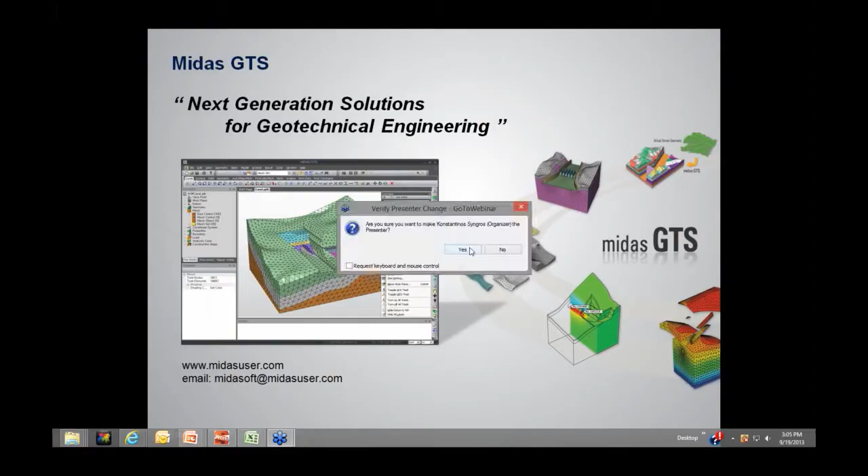Hello everybody, good afternoon. My name is Konstantinos Syngros, and today we will be presenting a case study on the foundation design for the Kingdom Tower, and how we used finite element methods to do the design, along with my colleague Alan Popel.

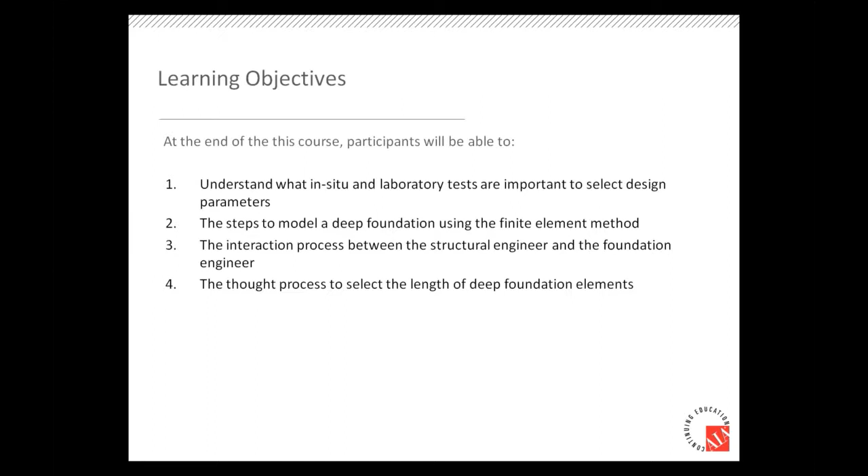Today's learning objectives will be to understand what in-situ and laboratory tests are important to select design parameters for this magnitude of project, the steps to develop a model of a deep foundation using the finite element method, the interaction process between the structural engineer and the foundation engineer, and the thought process to select the length of the foundation elements.

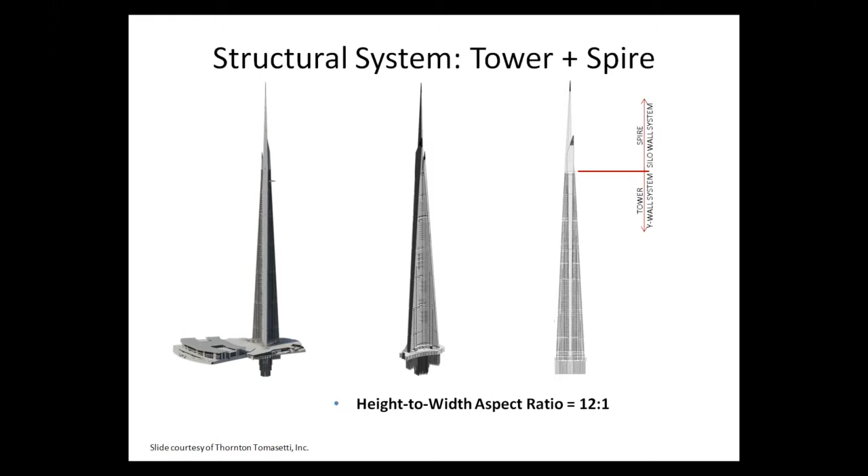This is a rendering of the tower. We can see on the left also part of the podium and part of the foundation. It's going to be a very slender tower with a height to width aspect ratio of 12 to 1. Just to put things in perspective, the spire is approximately as tall as the Chrysler Building in New York City.

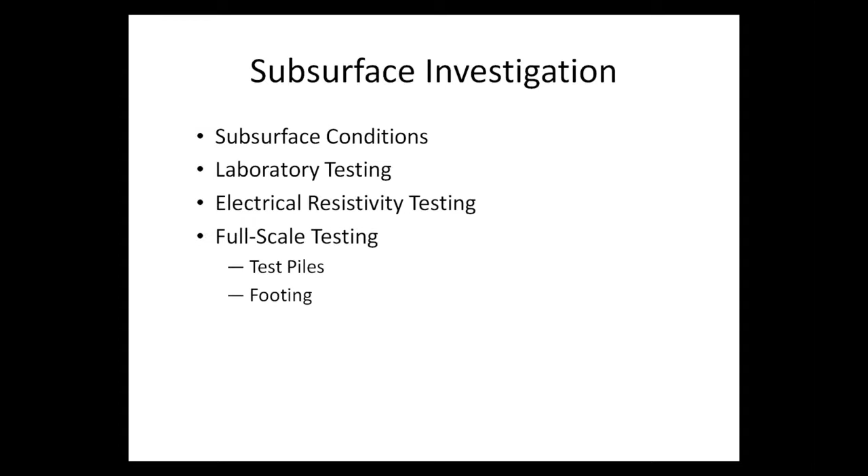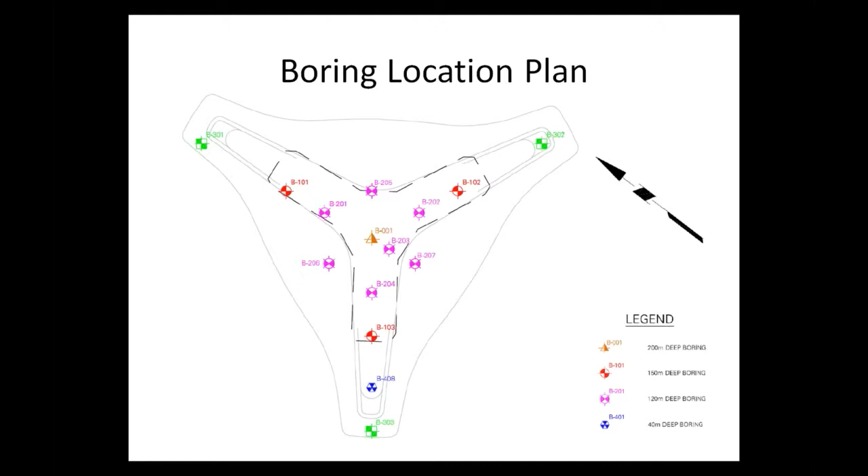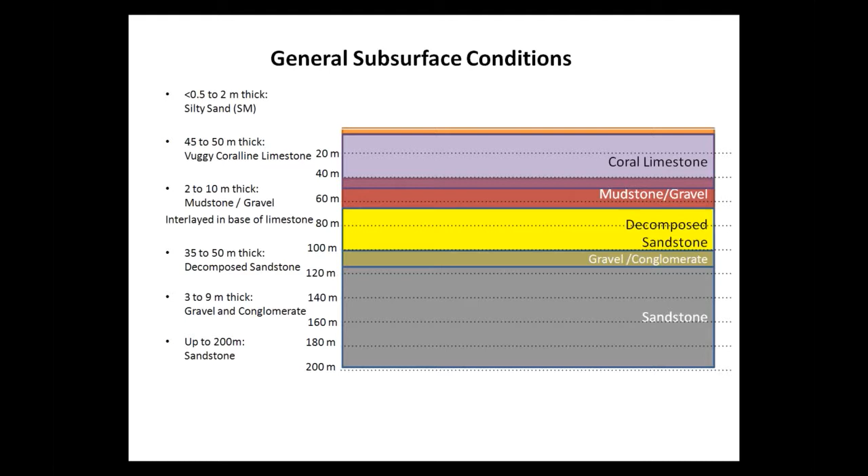The general subsurface conditions consist of a superficial layer of sand 2 meters thick, followed by coralline limestone up to 50 meters thick, then a mudstone gravel layer over compressible decomposed sandstone, a gravel conglomerate layer, and finally the more competent sandstone layer at around 120 meters from the ground surface.

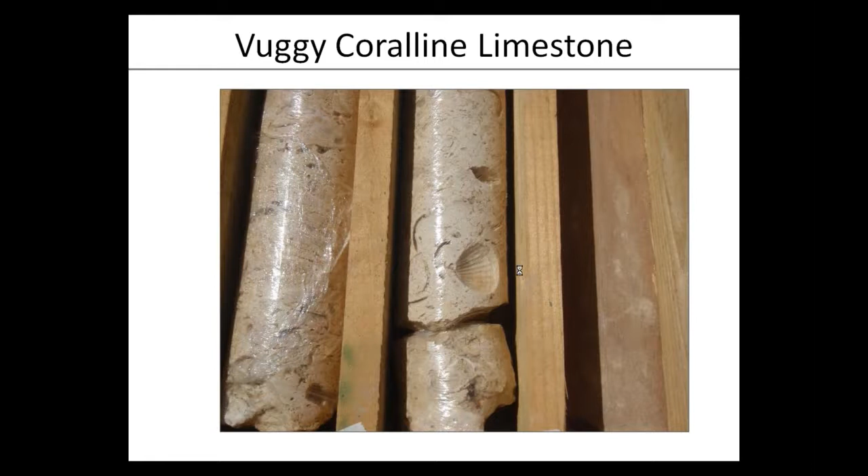We performed unconfined compression strength tests for a number of samples, showing that typically the strength ranged from about 1 to 3 megapascals, or about 10 to 30 tons per square foot. Of interest is the area between 70 and 90 meters below ground surface, where there was a drop in the strength of the material, to about half a megapascal, or 5 tons per square foot.

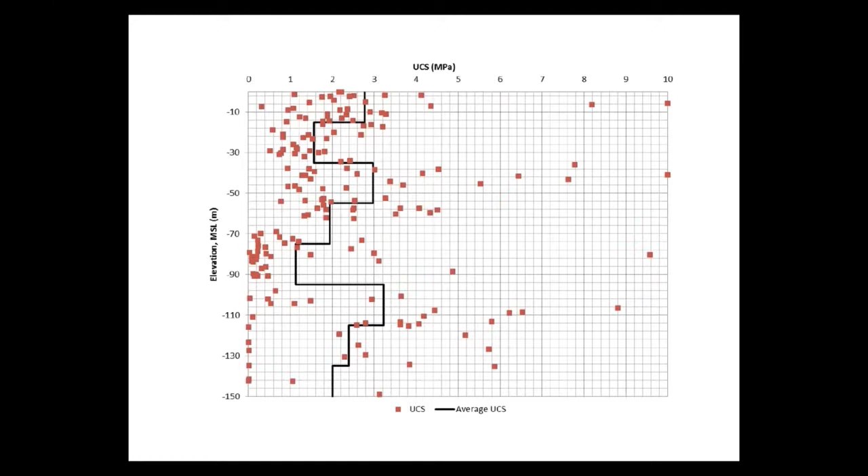So we performed a series of in situ and laboratory tests to determine an appropriate design modulus of deformation for the different soil and rock layers. We used information from instrumented unconfined compressive strength tests, pressure meter tests, triaxial tests, information back calculated from in situ load tests, and information back calculated from very low strain tests, for example shear wave velocity tests.

We saw that an appropriate range varied from the top, the top 30 to 40 meters, between 400 and 600 megapascals, and it dropped significantly at the zone of decomposed sandstone.

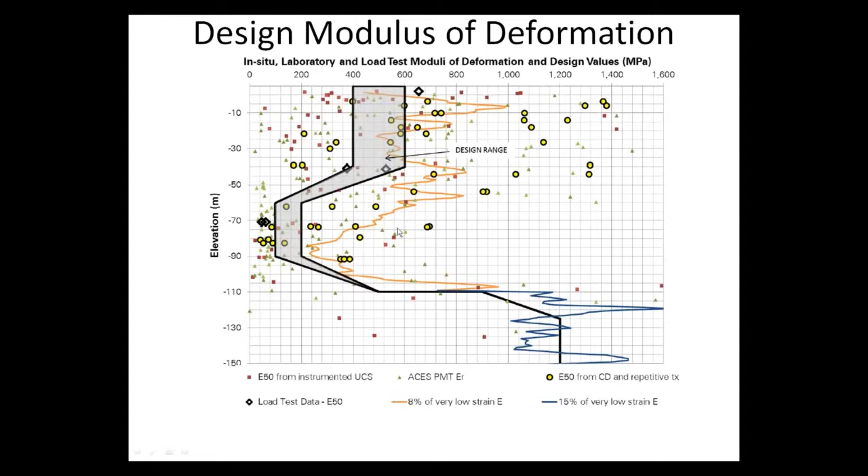We examined not only the overall tests below the tower, but also individually the tests below each leg of the tower, to make sure there is consistency among the results, and we took that into account when we selected our parameters.

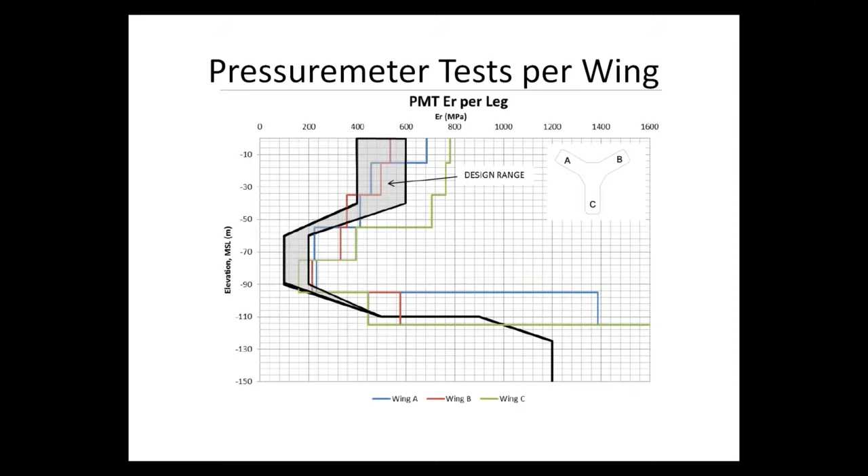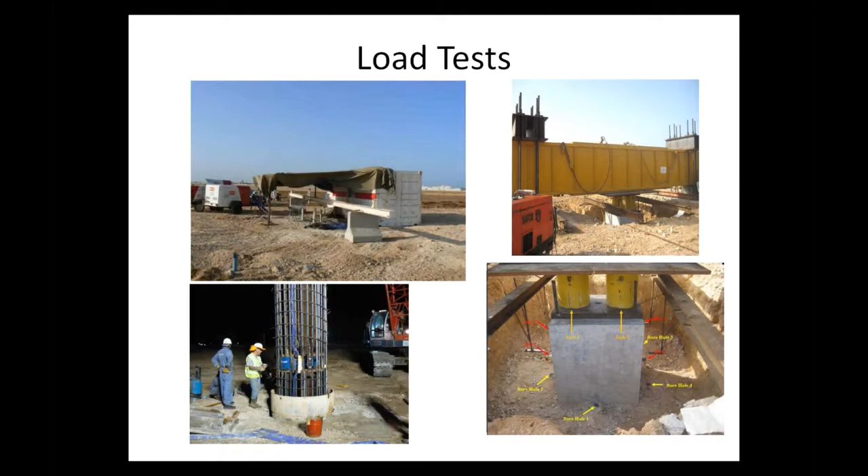These are pictures of the load tests at the site. To the left are pictures of the O-cell testing performed at bored piles, and on the right side are pictures of the footing load test performed on top of the coralline limestone layer.

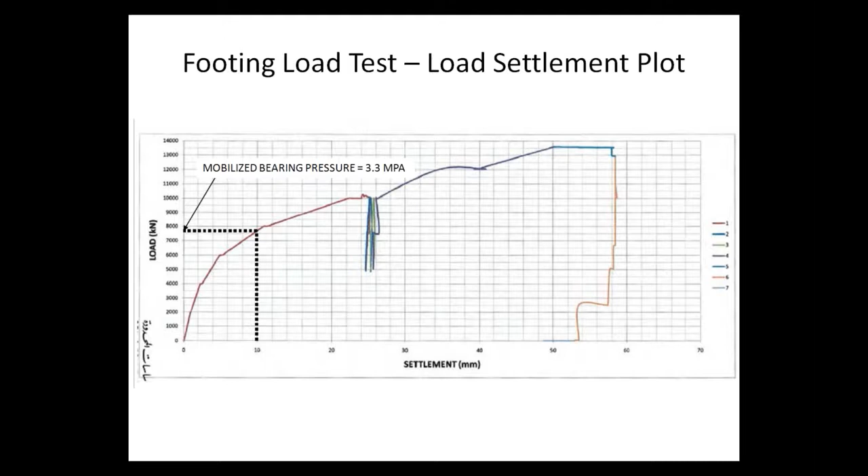This is the result of the footing load test that showed that for approximately a settlement of 10 millimeters, we obtained a mobilized bearing pressure of about 3.3.

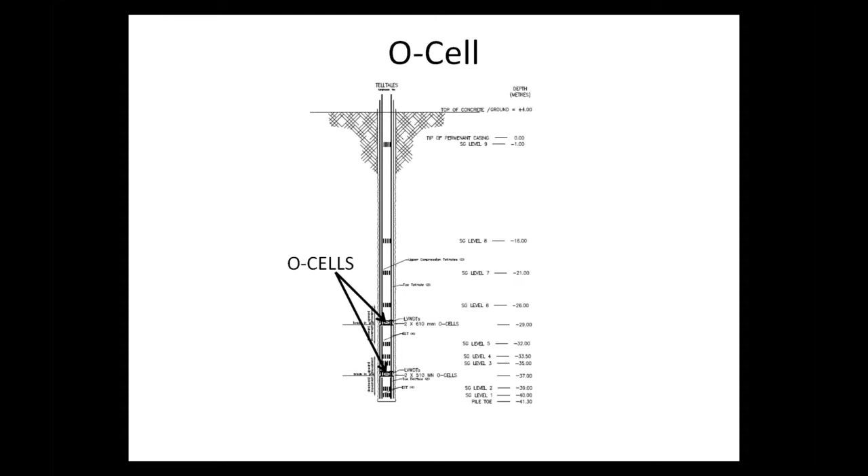This was a typical configuration of the O-cell testing, where we used two tiers of O-cells to better differentiate between the response of the toe of the bored pile and the response of the side shear. These are approximately 1.5 meters in diameter piles, and for a length of about 45 meters, the capacity was about 35 meganewtons.

Some of the early analysis.

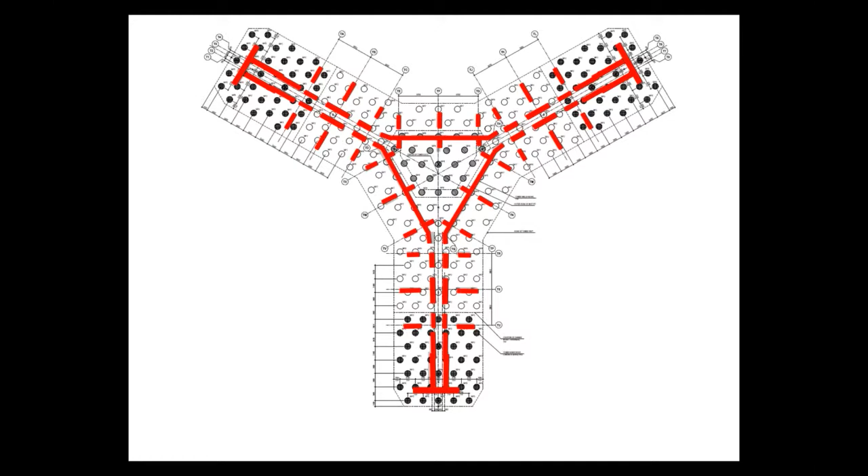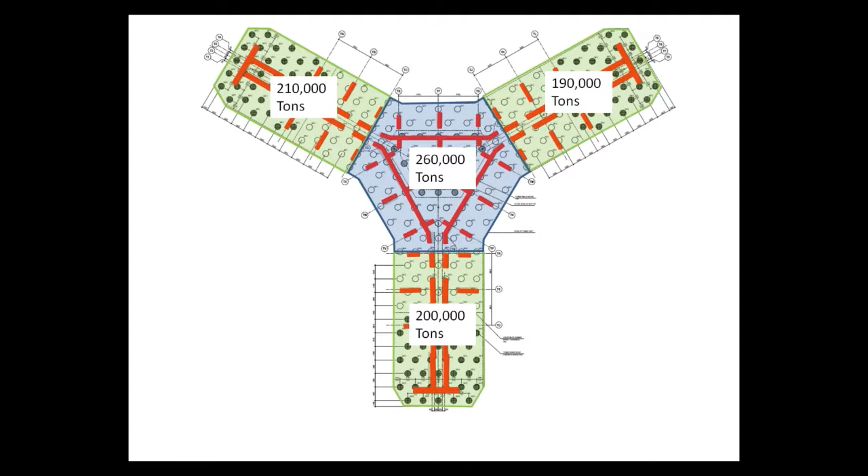This plan shows the locations of the shear walls marked with red. You can see there is an absence of shear walls at the middle of the tower, and the load takedown for each area of the wings at the middle of the tower was more or less equal, about 200,000 tons. Overall, we noticed that the foundation was loaded uniformly.

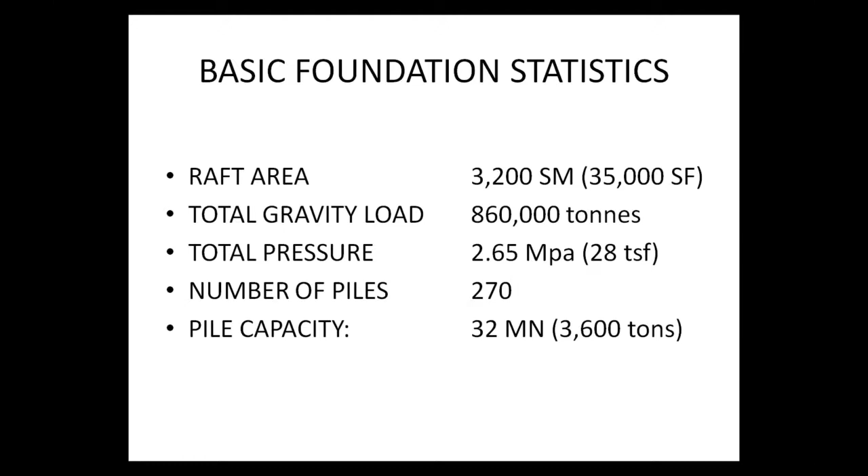Some basic foundation statistics: the raft area we ended up using is about 3,200 square meters, or 35,000 square feet, with a total gravity load of 860,000 tons, applying a uniform pressure of 2.65 megapascals, close to 30 tons per square foot, supported on 270 piles with an individual initial capacity of 32 meganewtons, about 3,600 tons.

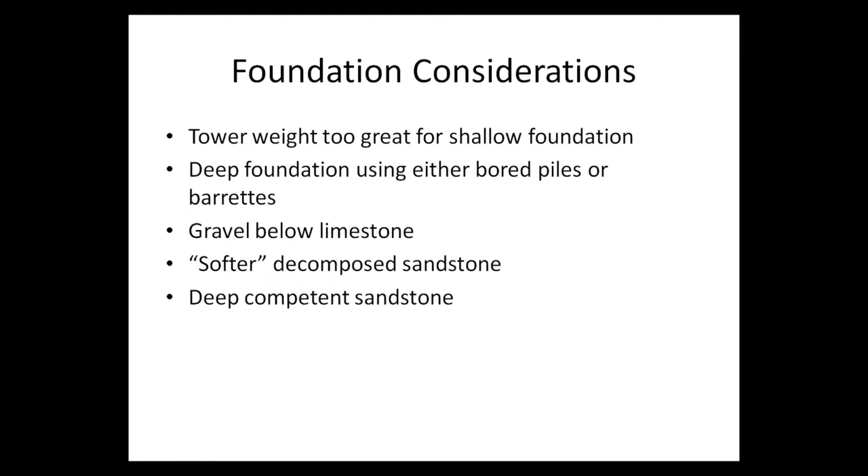Some of the considerations for selecting the foundation: early on we realized that the tower weight was too great to be supported by a shallow foundation, so we had to go with a deep foundation using either bored piles or barrettes. Barrettes are essentially piles with a rectangular cross-section. We had concerns about the presence of gravel below the limestone layer that would interfere with installation of deep foundation elements, the presence of softer decomposed sandstone, and the high depth of the competent sandstone.

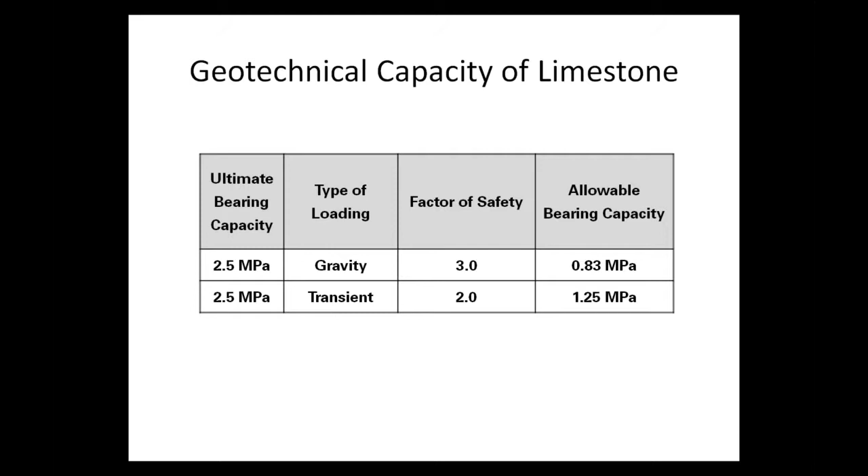Regarding the capacity of the limestone, just indicatively, we estimated an ultimate bearing capacity of about 2.5 megapascals, and using various factors of safety for different types of loading, we ended up with an allowable bearing capacity of about 830 kilopascals for gravity loads. When we compare that with the 2.65 megapascals mentioned earlier, we can understand why shallow foundation is not feasible.

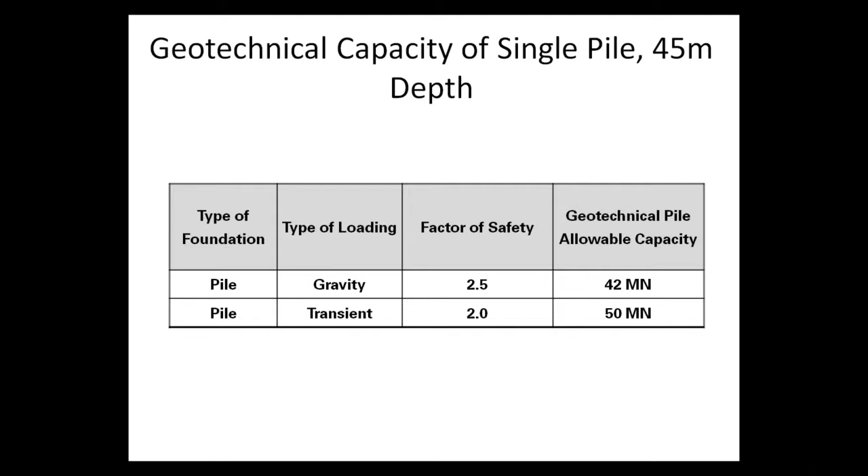Regarding the pile lengths, for a 45 meter depth, we could achieve a theoretical allowable capacity of 42 meganewtons for gravity.

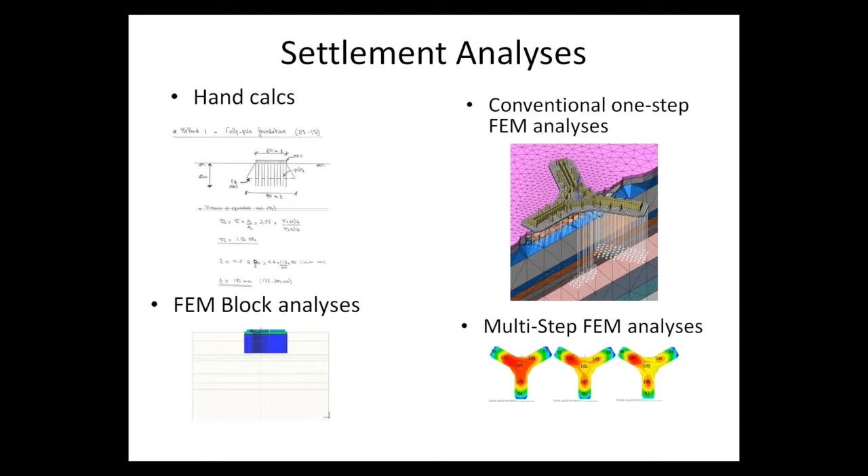We understood early on that this was not a capacity problem, but a differential settlement type of problem. So we had to start with some calculations and perform initial block analysis using finite elements, then continue with more appropriate finite element analysis using a one-step procedure, which is the regular way, and a multi-step or iterative procedure, which we're going to be talking about.

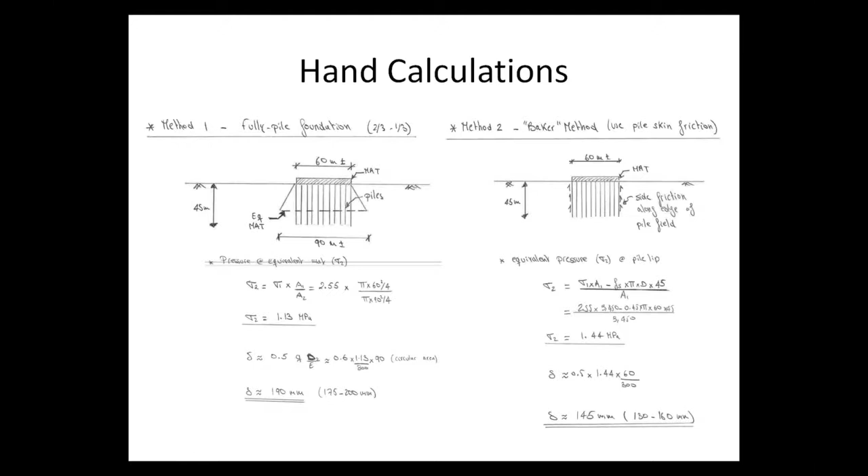For the calculations, there are a couple of methods available. One is a typical 2/3, 1/3 method, where you estimate the stress at 2/3 of the depth and use elastic solutions to estimate the settlement. The other is the Baker method, which uses similar assumptions to estimate the total settlement of the model at the top of the foundation.

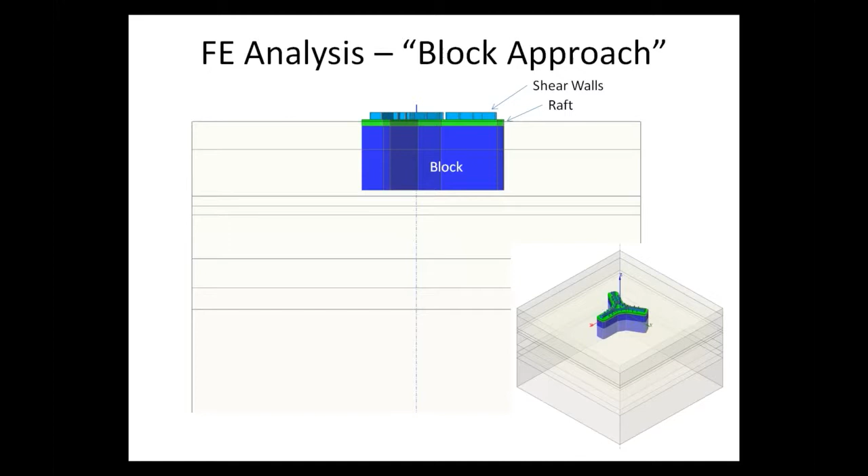The block analysis, essentially instead of taking the time to model 270 piles by themselves because they were close in space, you could consider the reinforced rock area as a block, attribute the appropriate elastic properties to the block, and then do your analysis.

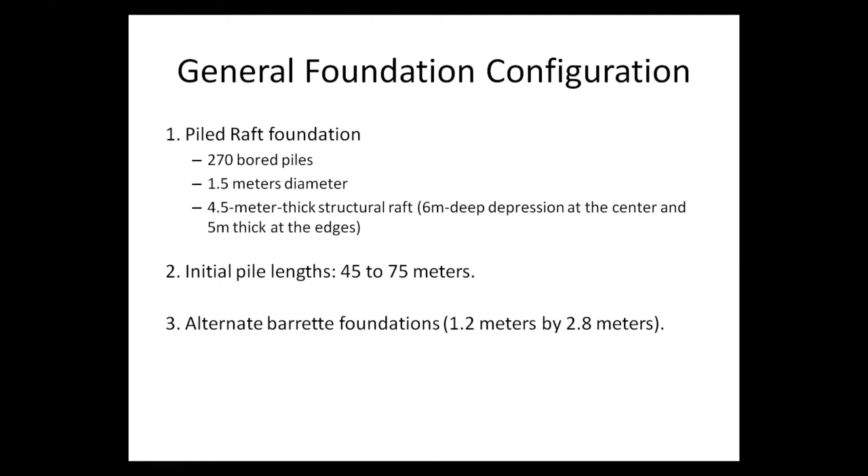Now we're going to talk about the conventional one-step method for finite element analysis. Essentially, we're talking about a pile-raft foundation consisting of 270 bored piles, 1.5 meters in diameter, supporting a 4.5 meter thick structural raft, which at some points becomes thicker, with initial pile lengths of 45 to 75 meters. We also considered another scheme of barrette foundations, 1.2 by 2.8 meters.

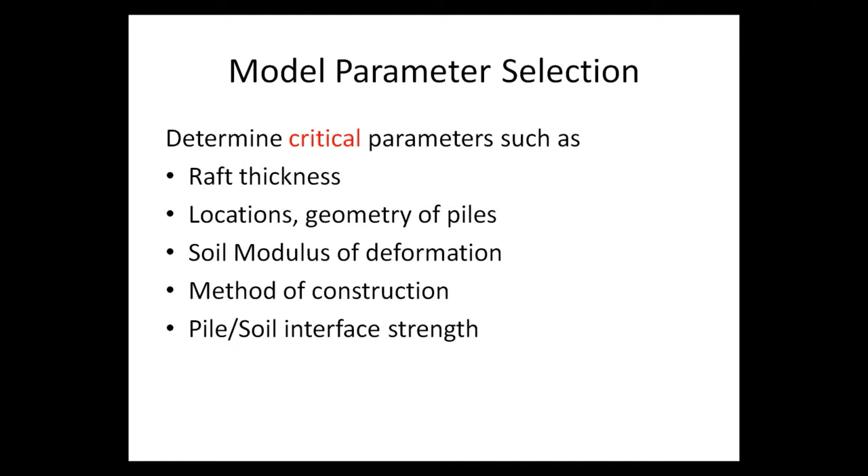Early on, we understood that for this magnitude of problem, we needed to find the critical parameters and focus on defining those parameters well that influence the problem the most. One was the thickness of the raft. Another was the locations and geometry of the piles, which is mostly the length of the pile that makes a difference. The soil and rock modulus of deformation, and then the method of construction, what kind of drilling needs to be used, and how that interacts with the pile-rock or pile-soil interface.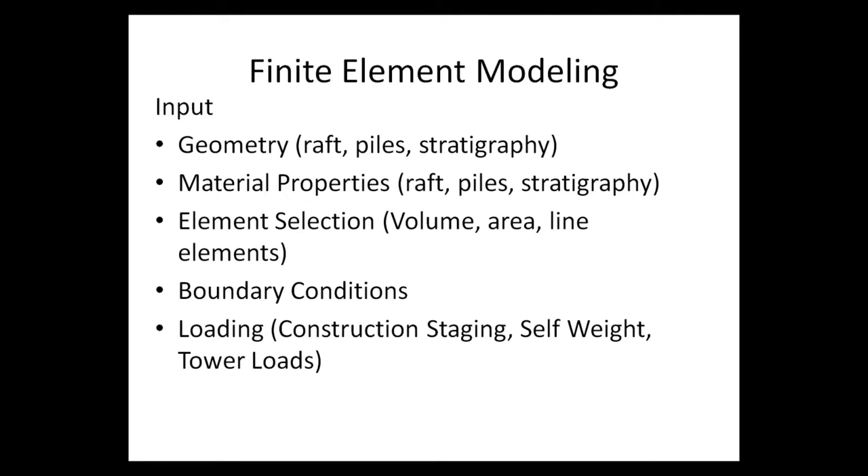In typical finite element modeling fashion, the input consists of defining the geometry and material properties of the raft, the piles, the soil and rock layers, having appropriate elements such as volume elements, area or line elements for the various parts of the network, defining the boundary conditions, and defining the loading, the construction staging, taking into account the self weight of the foundation and the tower loads.

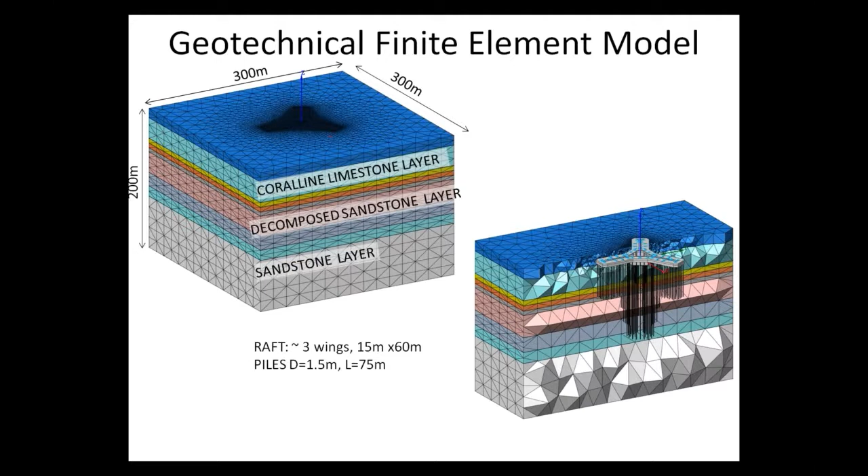This is what the finite element mesh looks like. To the left, it's a box of 200 by 300 by 300 meters. To the right, you can see that inside this box is described the pile-raft foundation. The raft has 3 wings that are approximately 15 meters wide by 60 meters long. Again, the piles are 1.5 meters in diameter and vary in length between 45 and 75 meters. The mesh becomes finer as you get closer to the foundation and coarser as you get away from it. Now you can see the various layers described, the coralline limestone layer and the rest.

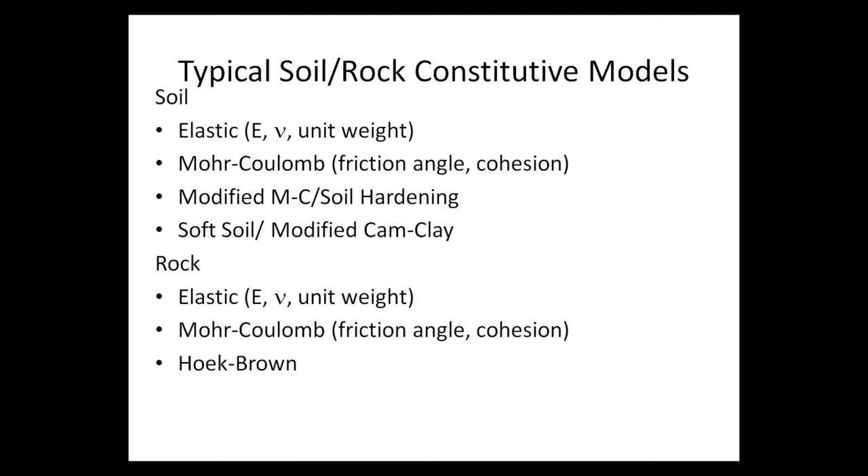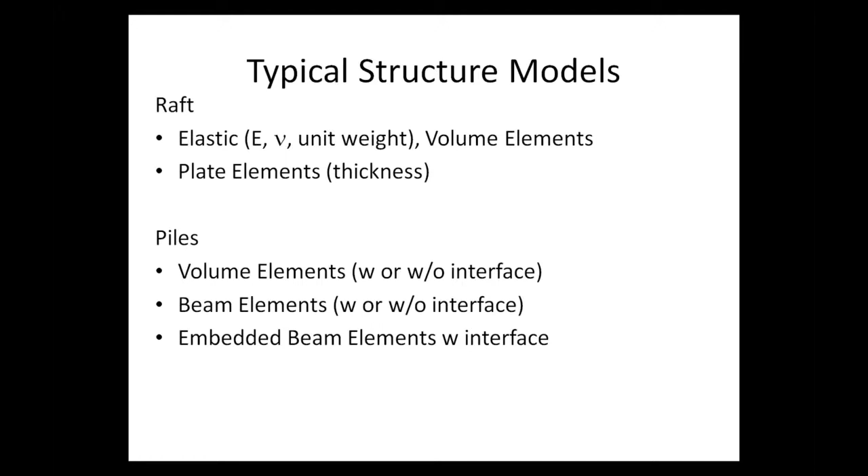Typical structure models for the raft: you can use elastic with volume elements, or you can use two-dimensional plate elements. For the piles, you have a bit more selection. You can use volume elements with or without an interface, beam elements with or without interface, and embedded beam elements with an interface.

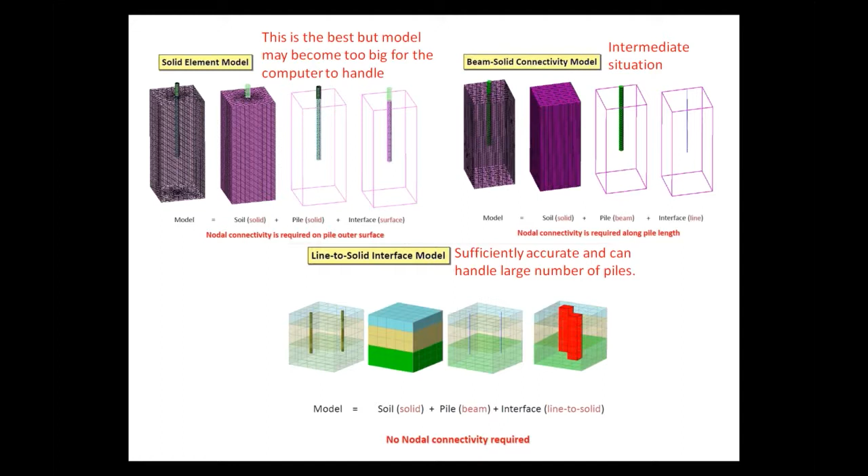So the best model is to use solid elements with an interface. This is shown on the left, but for foundations with more than 30 piles, it becomes very cumbersome to model, and the computer model takes too long to run, and it crashes too often. An intermediate situation is the beam-solid connectivity model, where the pile is described as a beam and not with volume elements. For situations with large numbers of piles, the model where the pile is modeled with a beam and there's a special interface between the pile and the soil is used. This is the best model, sufficiently accurate, and can handle a large number of piles. This was what was used for this problem.

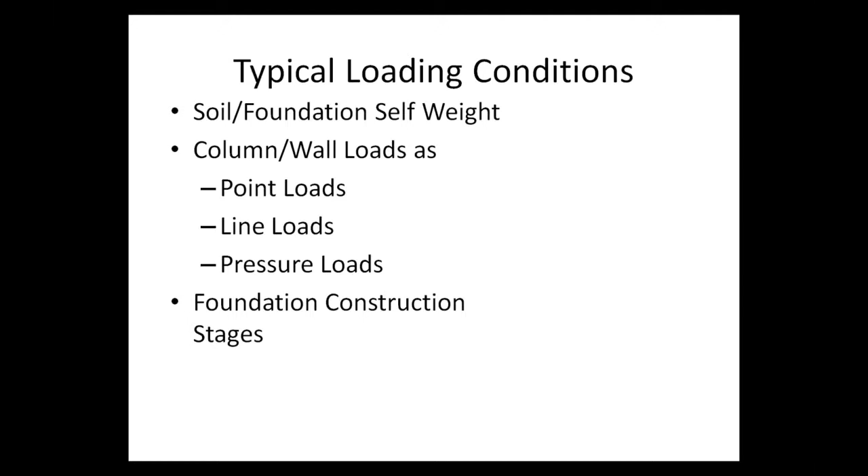Typical loading conditions, the soil and foundation self-weight need to be included. Column and wall loads can be modeled as point loads, line loads, and pressure loads, and the foundation construction stages need to be modeled. For this project, there was no basement, so the construction staging was simple.

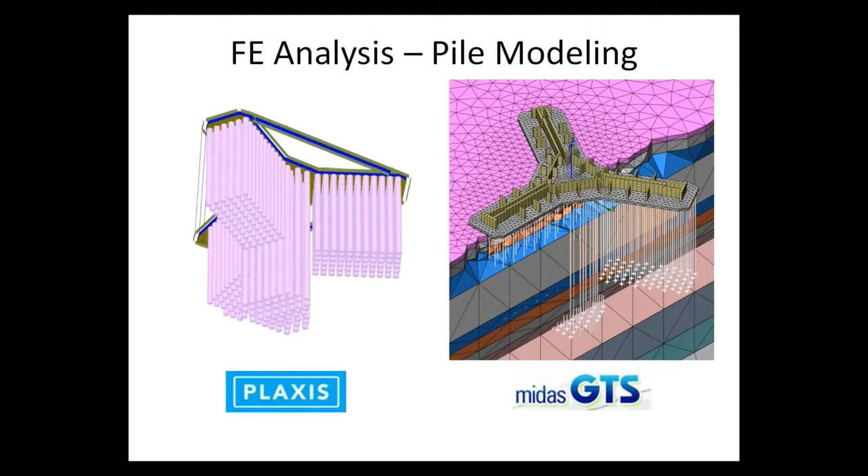Initially, we used two different computer programs with two different users to compare against each other, and the results between the two different programs were very similar.

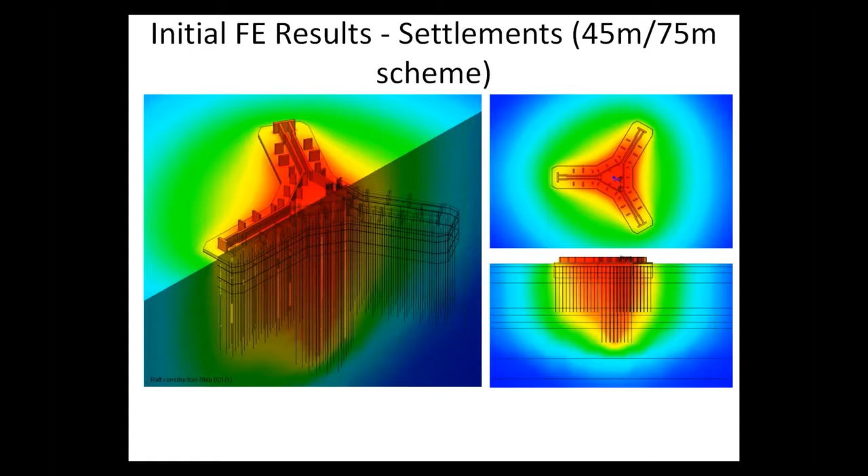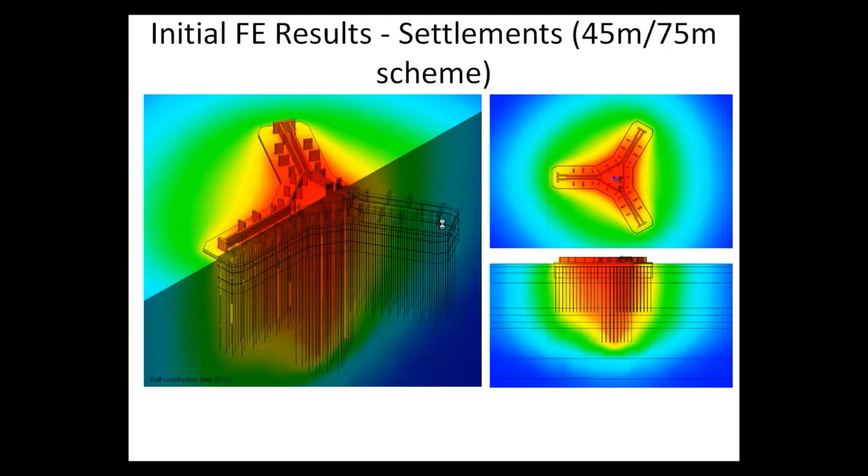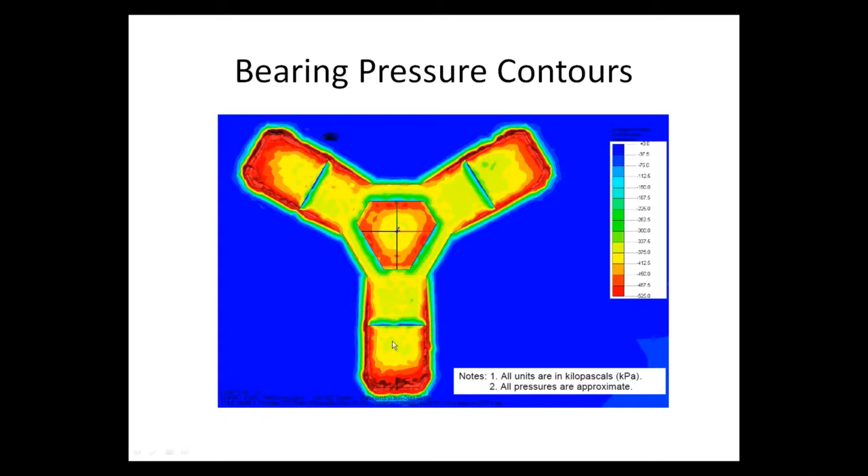The finite elements can also provide bearing pressure contours, such as those depicted here. We can see that stresses are higher at the edges of the raft, and there is a little bit of concentration at the bottom.

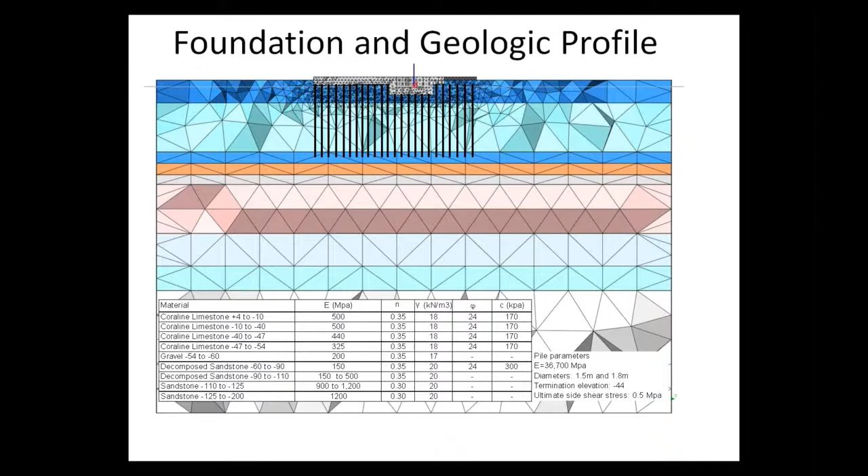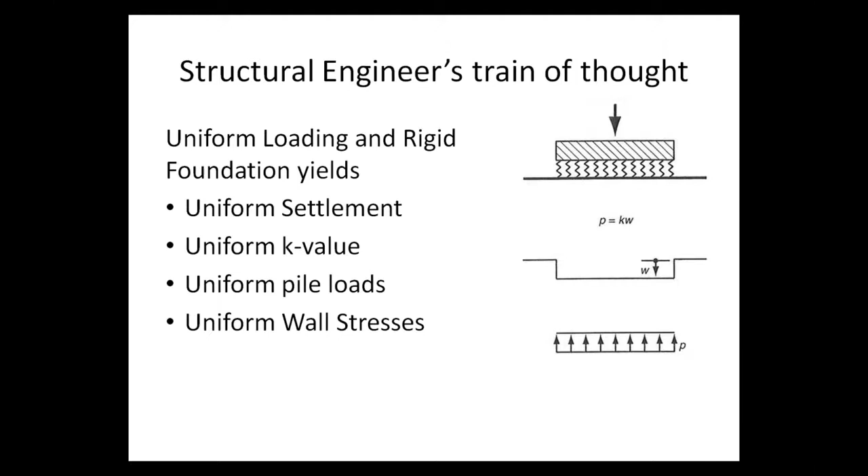Now, the structural engineer's train of thought for this project was that we have approximately uniform loading, as we saw earlier, about 200,000 tons per leg, and a rigid foundation based on the fact that it was a 4.5 meter thick raft. As a result, we were expecting uniform settlement, which would result in a uniform single K value, which is a spring or a modulus of subgrade reaction, and eventually would result in uniform pile loads and uniform wall stresses. These were the results that the structural model obtained.

However, as geotechnical engineers, we are aware that if below there is a footing, to obtain uniform settlements below the footing, the stress distribution cannot be uniform, but it has to be non-uniform with higher stresses at the edges. This is what the theory of elasticity predicts. Accordingly, there cannot be one single K value that can model this behavior. There has to be at least two different K values to model what happens at the center and at the edges.

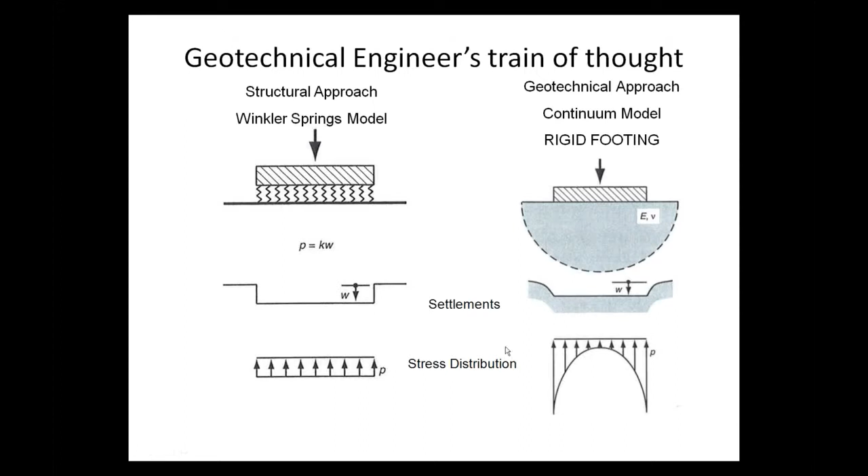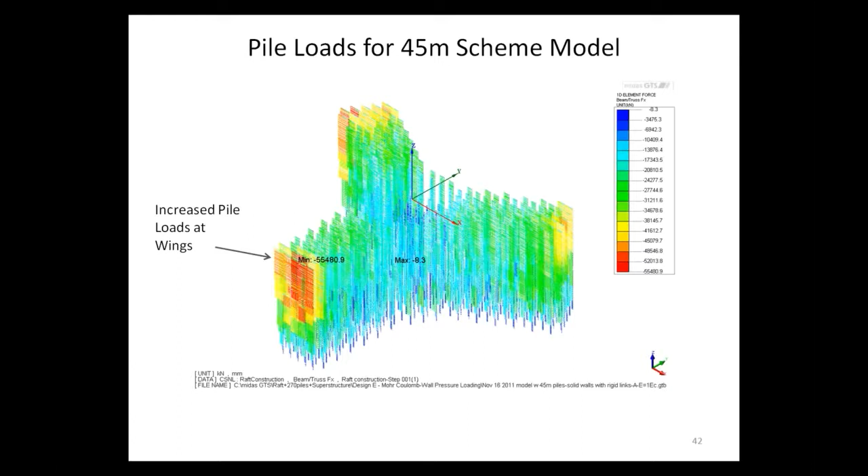We started noticing some deviations between the results of the structural model and the geotechnical model, and those differences were mostly at the pile loads at the wings of the foundation. We noticed that we were getting very high loads at the piles at the edges, whereas the structural engineer was obtaining uniform loads.

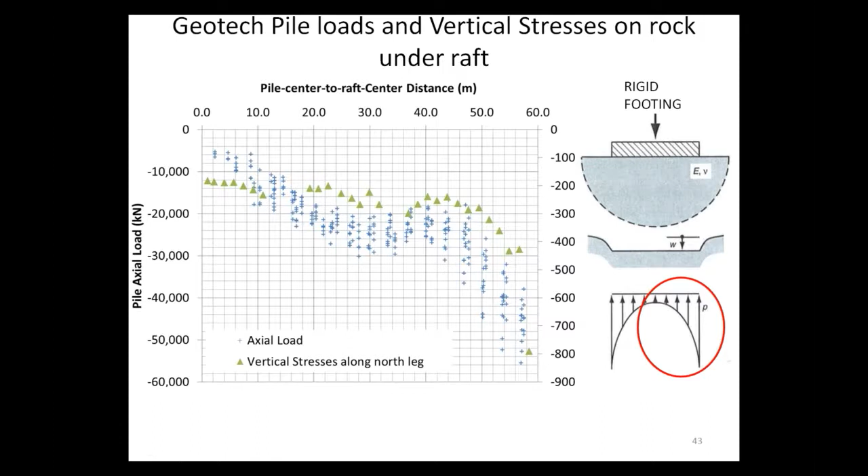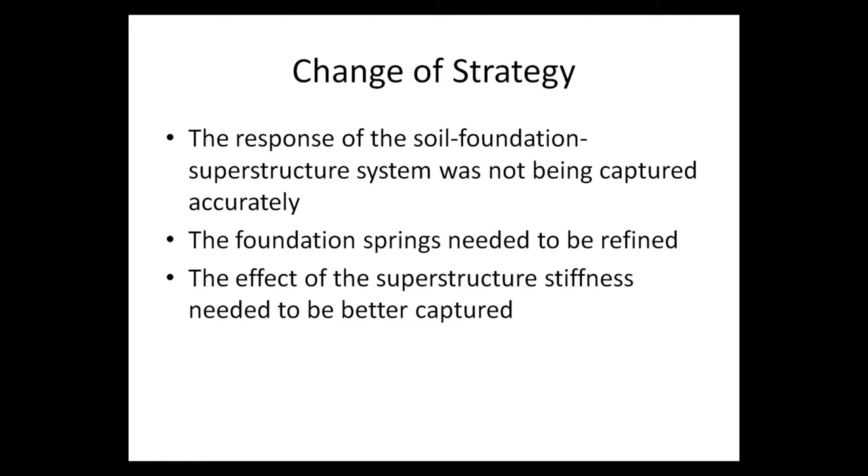So we knew that the structural model and the geotechnical model were not capturing the effect correctly. The response of the soil-foundation-superstructure system was not captured accurately, and the foundation springs needed to be refined. On top of that, the effect of the superstructure stiffness needed to be better captured by the geotechnical model.

That led us to change our approach, and instead of using a one-step procedure, we will talk about what it is exactly, we used a multi-step procedure.

Let's start with a simple case of a raft foundation, no piles. The structural engineer provides the column loads to the geotechnical engineer. The geotechnical engineer does the finite element analysis, predicts settlements, and provides spring constants to the structural engineer. The structural engineer runs his or her model with the new springs, predicts foundation settlements, and then there is an iterative process to update the springs until the settlements between the structural model and the geotechnical model converge. This is a one-step process if the structural engineer only provides the column loads to the geotechnical engineer one time.

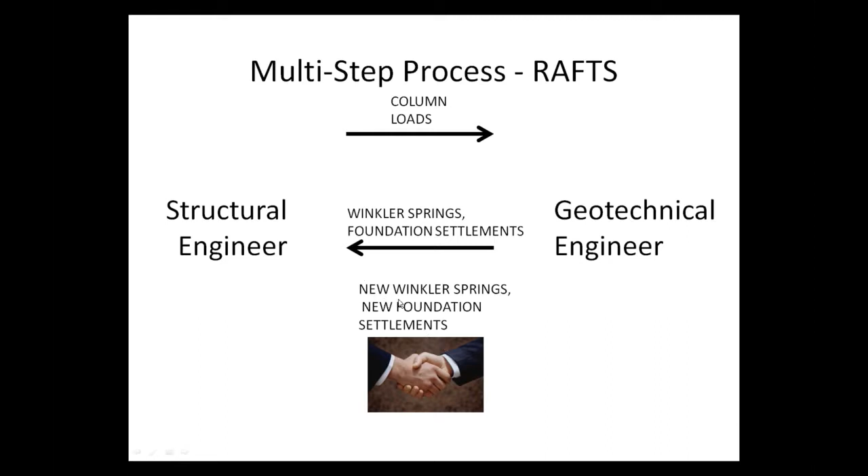The multi-step process would be if at the end of the converged solution, the structural engineer checks the column loads and sees that there are changes in the column loads that were caused by the new springs, then supplies the geotechnical engineer with a new set of column loads, and this cycle gets repeated again. So this is the process for rafts.

If we have a foundation that is a combined pile raft, then in addition to the raft settlements, we would require convergence between the geotechnical and the structural model on pile loads, the load sharing between piles and subgrade, and the column or wall loads for the structural engineer between iterations. The iterations continue until the wall loads between successive iterations are below a certain percentage.

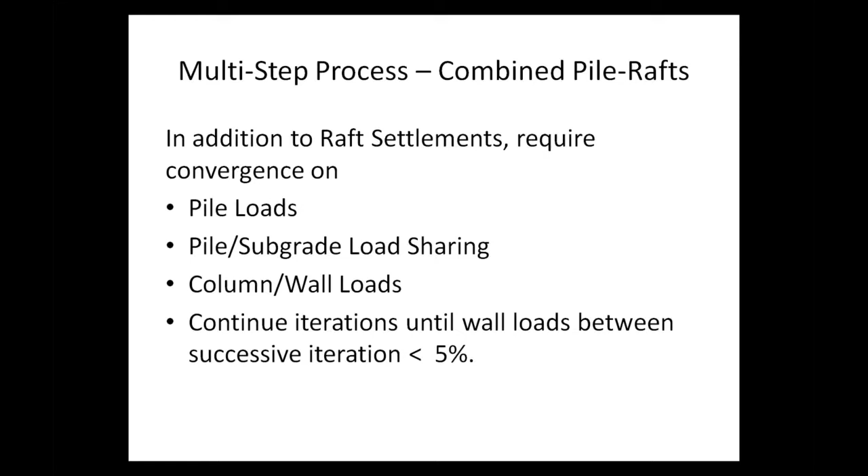For this project, high accuracy was required, so a 5% tolerance was set. Now, for the 45-meter scheme, when we started following this procedure, we saw that it required many iterations, and the results did not always converge.

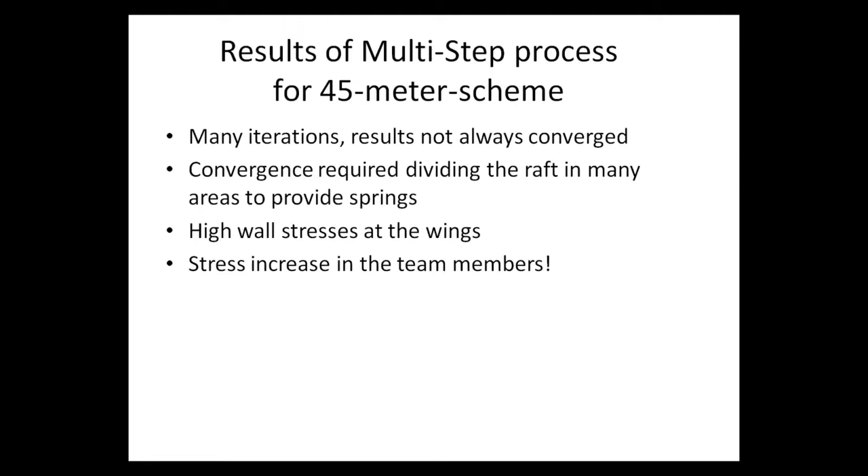To achieve better convergence, it required that we divide the raft into many small areas and provide springs for all those areas. The structural engineers started predicting high stresses on the walls in this model, and overall the stress level in the team increased considerably when we started doing this method.

This is to give you a better idea of what was happening. At the top are the results of the geotechnical model, and at the bottom are the results of the structural model. So for the first iteration, we had this sort of settlement contours, and we provided the springs to the structural engineer, who in turn ran their model and predicted this settlement contour, which did not match our settlement contour.

So they ended up giving us a new set of wall loads. We reran our analysis and predicted a new settlement contour, and we followed this method. As you can see, for this type of foundation with 45-meter-long piles, the settlement contours did not appear to converge.

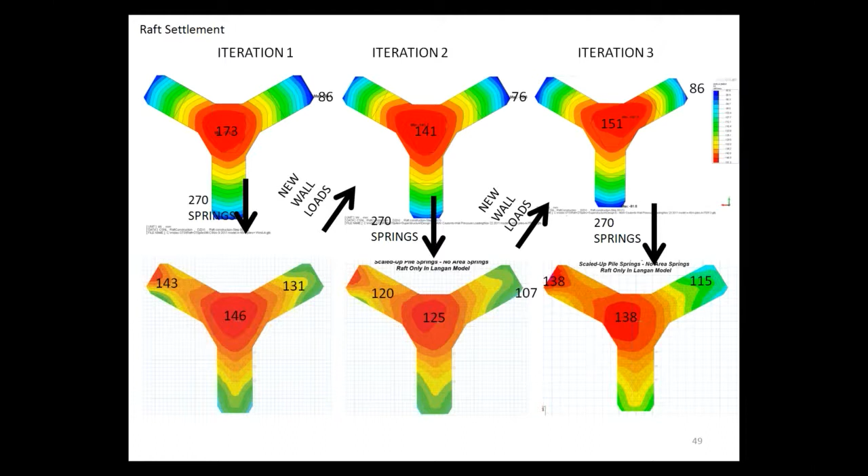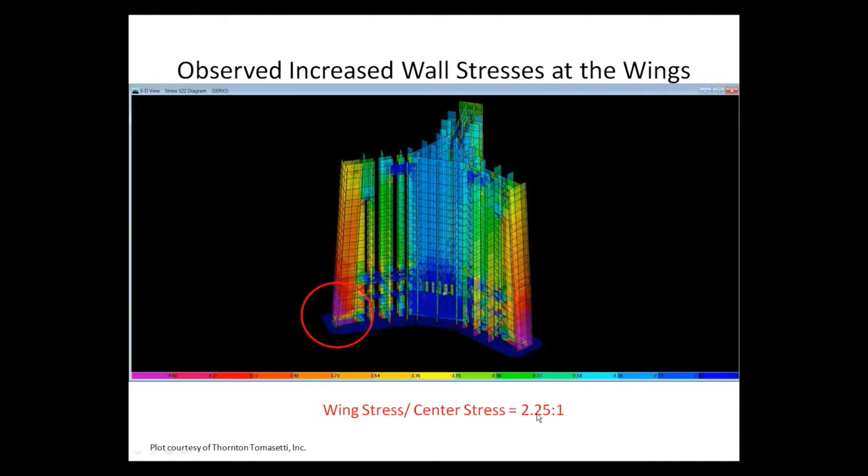This is a plot that shows that the stress at the wings of the structure started to increase, and compared to the stress at the walls of the center of the building, the wings were more than 2 times higher, and this could not be tolerated by the structure.

So this led us to revise our foundation scheme. What we did was we compared the foundation response without any iterations. So we started from basics, just one set of wall loads, and we compared the foundation settlement contours between the 45-meter scheme and the scheme that had

longer piles at the center. And we saw that the 45-meter scheme leads to a significant redistribution of wall loads, whereas a deeper scheme leads to a minor redistribution. So it was an easy choice to make.

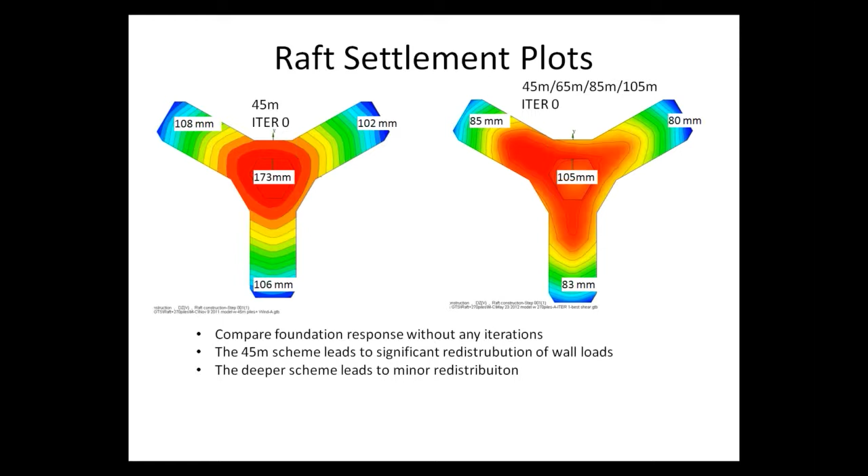Either we would have to increase the stiffness of the foundation to limit the redistribution of stresses in the structure, or the structure would have to change stiffness, which was not preferred. So we decided to increase the stiffness of the foundation.

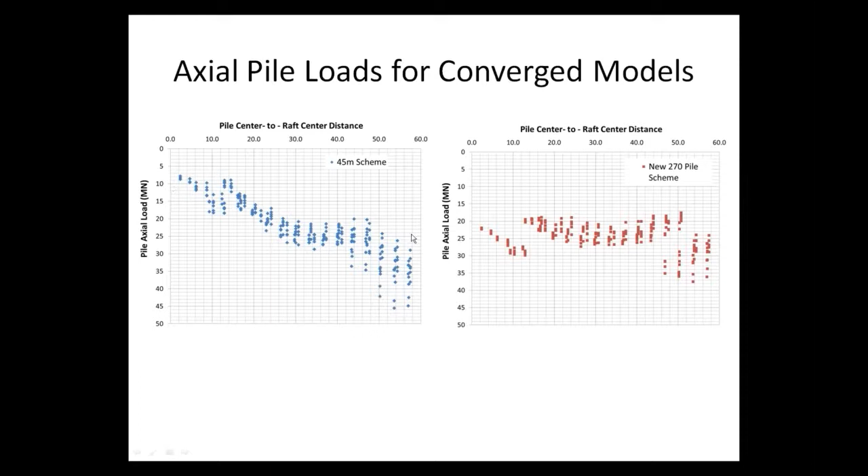Once we started increasing the stiffness of the foundation, the relative distribution of the pile axial loads started to change. So instead of noticing that the axial loads at the edges are much higher than the axial pile loads at the center of the raft, they started becoming more uniform.

Then there was the question of where do we stop the piles? This is a good representation to see what options we have. To try to put the piles inside the competent sandstone layer would lead to very high lengths, and it would not be feasible to construct.

If we tried to stop them at an elevation between 110 and 125, we would create a hard spot at the piles, which was also not desirable. If we tried to put the piles inside the compressible decomposed sandstone, well, obviously that would not be good because we would have increased settlement.

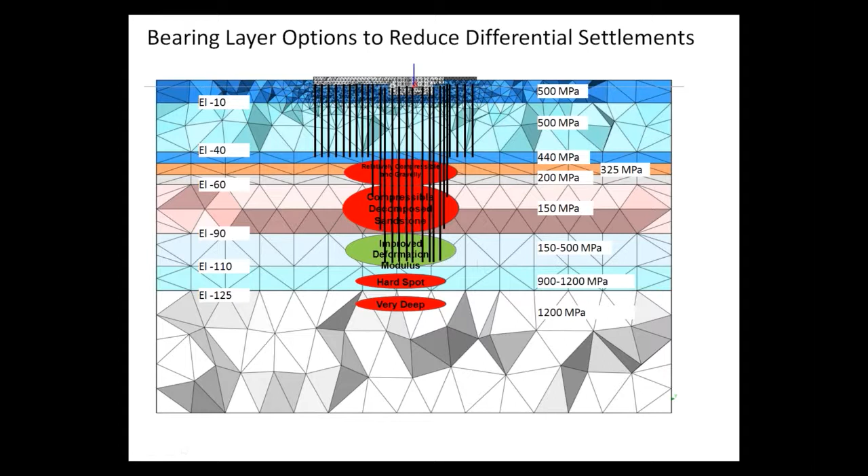We knew we needed to increase the length of the piles beyond the typical 45 meters, into a relatively competent sandstone. So we ended up using lengths of about up to 105 meters to stop the piles at the center in this layer. We had a tapered pile foundation starting from about 45 meters length and going all the way to 105 meters at the center.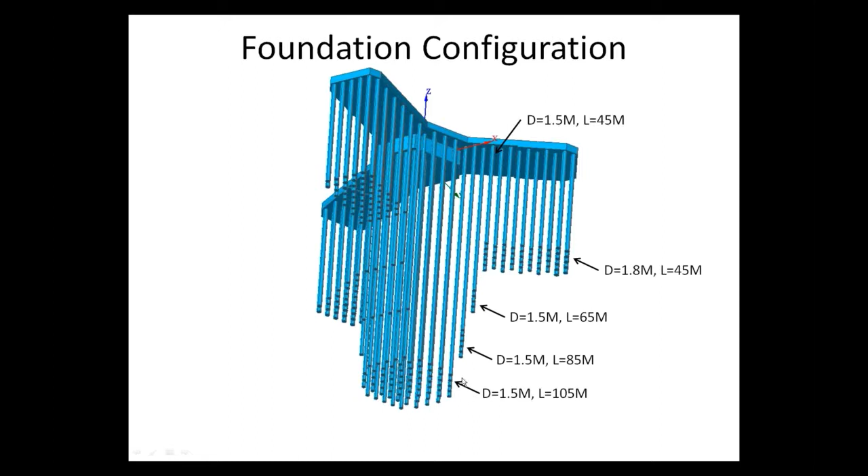Once we started using a tapered foundation, convergence between the structural model and the geotechnical model was much more easily achieved. In this graph, we can see how the settlement values progressed from the initial set of column loads to the final set of column loads. And we can see that settlements did not change all that much.

However, there was a big difference in the wall loads. The walls of the wings, here, here, and here, ended up increasing in load by as much as 50% during the first iteration, which shows how sensitive this analysis is to the stiffness of the superstructure. Once we compared, we showed that in between iterations, the changes in the wall loads were very small, which shows that we have achieved convergence.

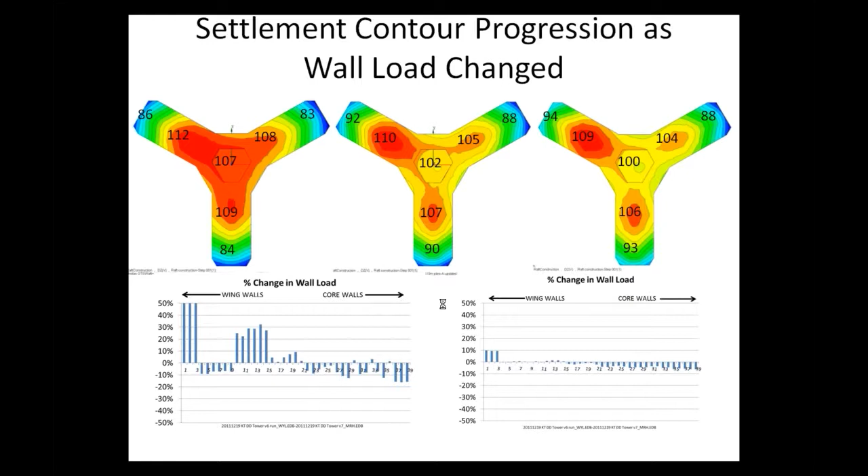We provided to the structural engineer a set of 270 different pile springs and a set of 16 different area springs. There was a big range in springs between 200 and 430 meganewtons per meter, and an even more pronounced change in the area springs between 1.5 and 30 meganewtons per meter cube.

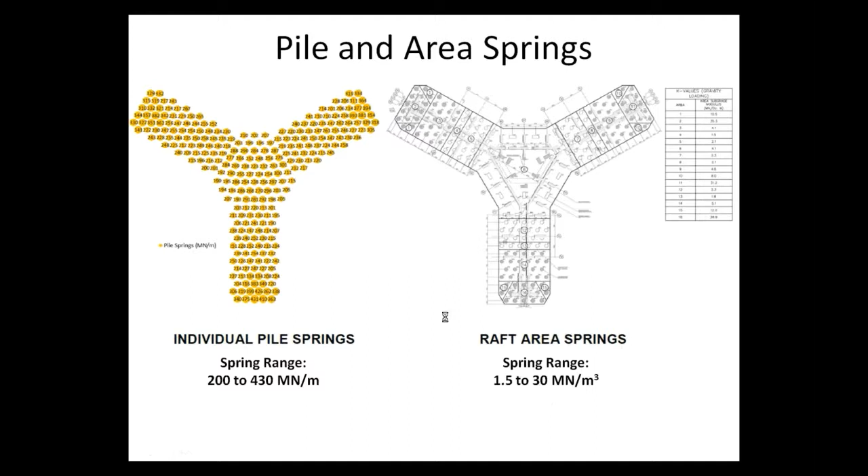This is what it looks like to have convergence in settlements between the geotechnical model on the left and the structural model on the right. You can see that the models are very close.

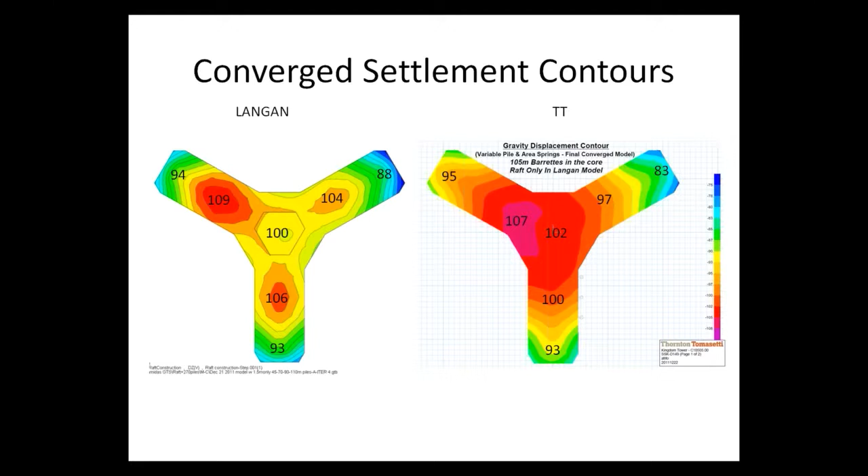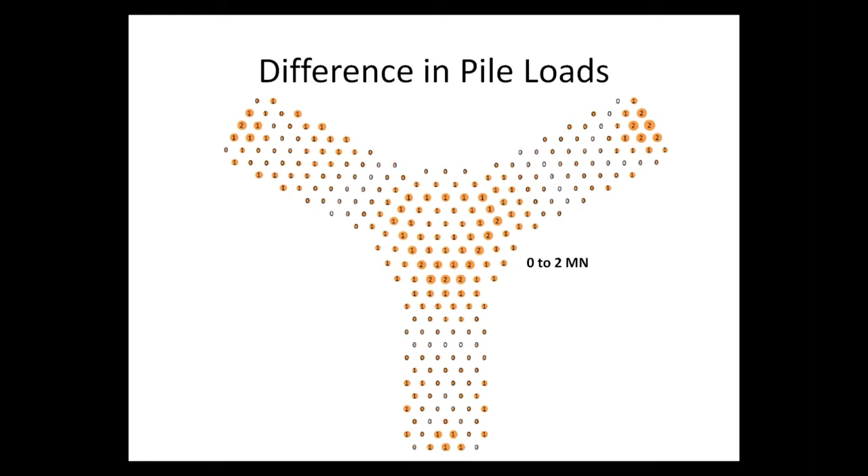The difference in settlements at the locations of the piles were all within 5 millimeters between the converged models, and the difference in pile loads between the converged models were between 0 and 2 meganewtons.

Using the stiffer foundation with the higher lengths at the center of the foundation was able to alleviate some of the stresses on the walls on the wings, reducing the ratio from the previous 2.2 compared to the center wall stresses to just 1.6, which was something that the structure could handle.

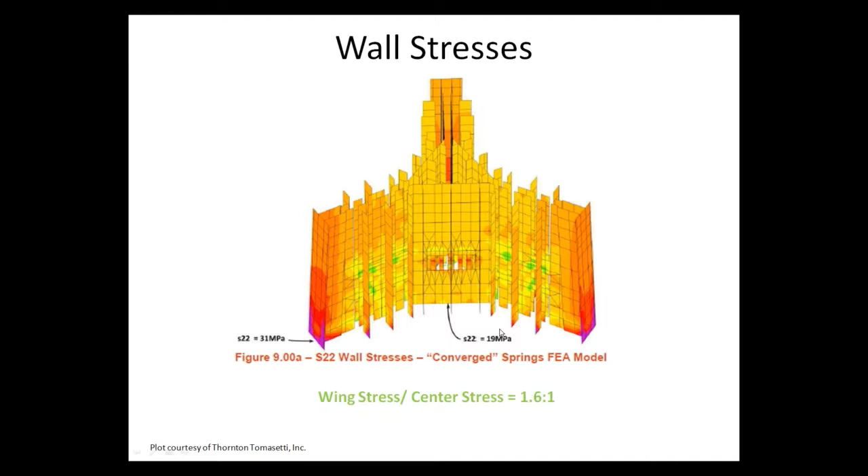And then the final remarks. The geotechnical model typically governs the ground settlements, and this iterative process or multi-step process gives an insight on the redistribution of column and wall loads.

The geotechnical engineer does not have to attempt to model the stiffness of the superstructure. If the geotechnical engineer attempts to do that, you will see that you will not be able to reach a convergence with the structure.

This redistribution of column and wall loads is more pronounced when the superstructure is very stiff compared to the foundation. So this redistribution is not typical for all sorts of buildings that are out there. It's more pronounced for structures that are as rigid as this tower.

The redistribution necessitated stiffening the foundation by using longer piles under the center of the raft. The longer piles are not needed for an increased soil bearing capacity — we have one with a 45 meter scheme. They are needed to alleviate the increased outer wall stresses in the superstructure.

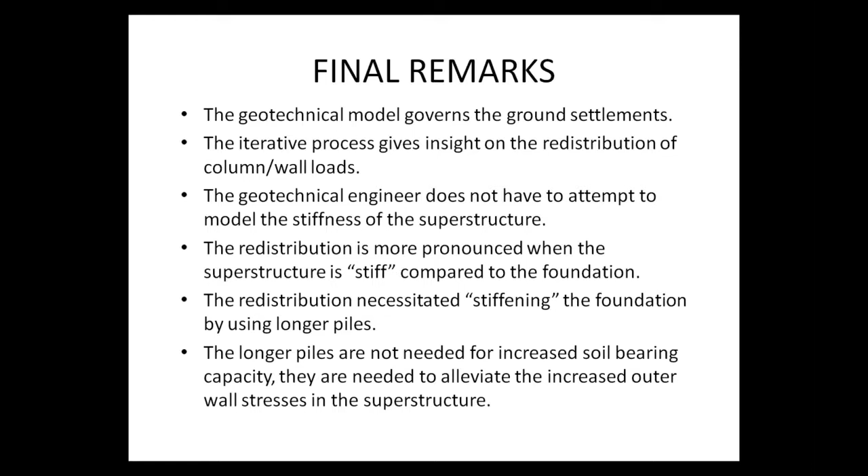With that, I would like to thank you and turn the control back to my colleague.